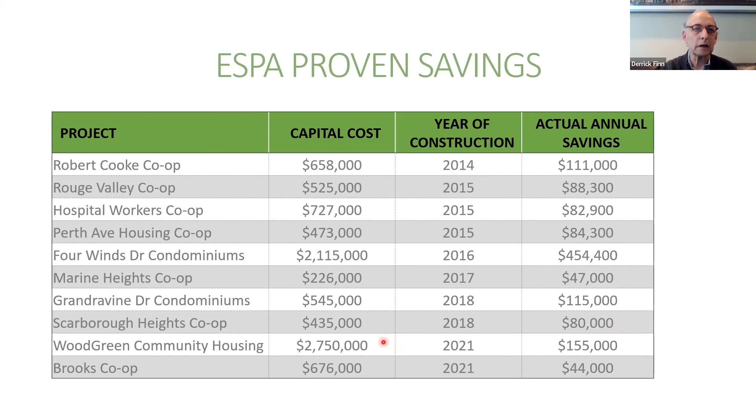So the idea of an energy audit is to understand what energy is being used in the building, how you can use it more efficiently, what measures can we do, and most importantly, what building renewal measures can we affect. We're all looking for reducing energy, reducing greenhouse gases, and how do we go about this?

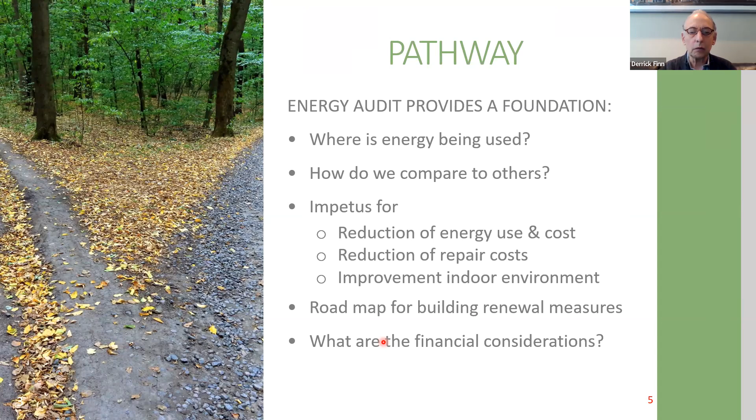So we see this really as a roadmap as to how we're going to proceed within our programs. There are 3 types of energy audits defined by ASHRAE, the American Society for Heating, Refrigerating, and Air Conditioning Engineers — a big organization in the States and throughout the world.

They've defined them. The first is a walkthrough audit, which simply is going through a building very quickly, collecting some basic data, looking at the utility bills, and saying, yes, looks like we can save money by replacing the boiler, or you have some lighting opportunities in the garage, etc. It's very ballpark — it's not measure by measure.

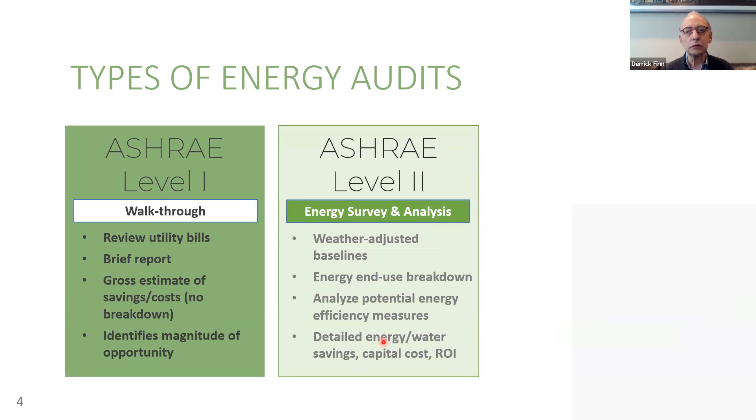The next is an ASHRAE level 2, which is a much more detailed survey. We take utility bills, go through an analysis using variables like weather — so it's weather adjusted, could be occupancy adjusted, production adjusted — and we break down the energy use within the building by each of the elements, and do an analysis, a detailed savings calculation. I'll show you some examples a little bit later, showing the savings, the costs, and the return on investment.

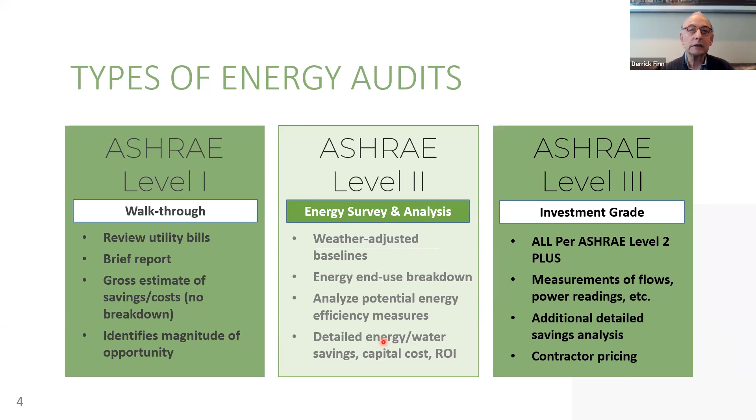When we step into the energy savings performance agreement, or the guaranteed savings, we need an investment grade energy audit. So it's everything that happens in level 2, plus we also go and do some additional measures — we measure how much air is coming out of a rooftop unit, the makeup air unit, the power being drawn by pumps, motors, etc., the critical equipment. Then we go back to the calculations and do much more detailed modeling. We go to contractors, get contractor pricing so that we can guarantee not only the savings, but the pricing as well.

So the process involves, number one, if we can get incentives — and we can right now through Enbridge, for social housing $8,000, up to $8,000, for other buildings up to $4,000 through Enbridge. Collect all the data, we get utility bills, building condition audits, and then we input all of this to develop the baselines, and we benchmark the buildings against each other.

Through our site visit, we break down, as I've mentioned earlier, the lighting, the heating. Now these are individual — this is not a cookie cutter. Every building we would produce one of these end use breakdowns, because we want to say, okay, where is the lighting and where is the heating? So for example, heating is 47%, so we know we have that much to play with in energy efficiency. We can't save 100%, because we only have 47% of the energy being used.

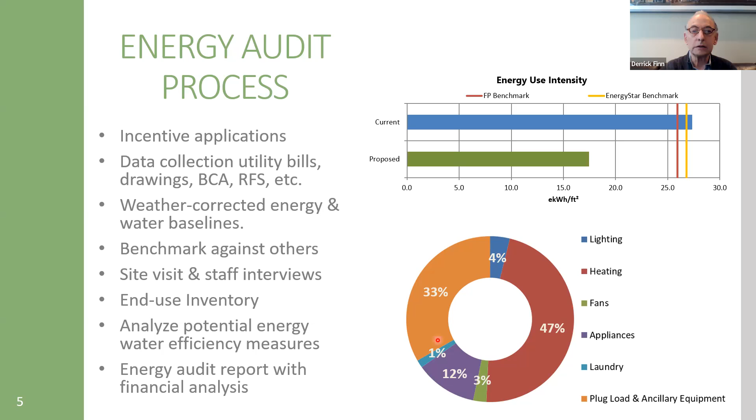So we list the potential measures, and we do a report with the financial analysis giving us paybacks or return on investment. The critical thing here is the weather-corrected baselines or any other variable, because this is what we use going forward. This is what we would measure against.

The baseline is this black line, which is generated by the computer, and it's really just a simple regression formula based on occupancy, weather, or production. These bars are the actual data, and you can see in this case it's a pretty good fit from the baseline. This is what we would be measuring going forward. We would input the weather data and we'd be able to see the savings. I'll show you an example.

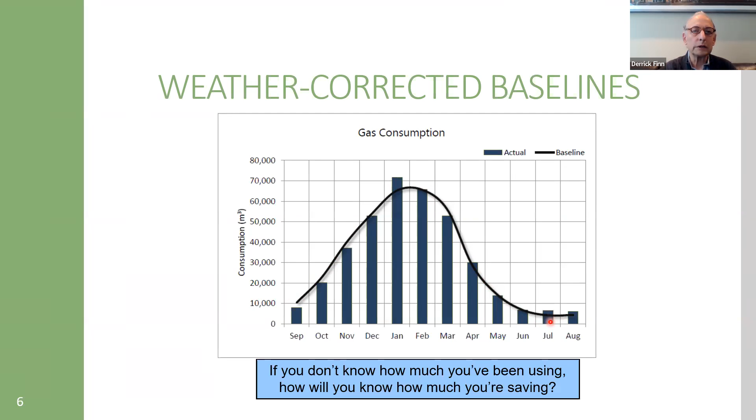We really need to know where we are before we can measure how we're going forward and what we're saving. A lot of early programs went in for lighting, compact fluorescents back in the 90s. We just threw them in and nobody ever measured, so we never really got some good data.

Then we go to the tools that we use. I mentioned that we use regression tools to develop the baseline. RETScreen has a good service and good software. We use Metrix as well. We've developed our own data collection software on iPads, so we go through the building and pick up make, model, serial number of every piece of major equipment, plus lighting, toilets, whatever else we want to model through eQuest, and RETScreen again for clean energy management.

One of the keys to being able to guarantee energy savings and react in real time is to be able to put in real-time energy management for gas, water, and electricity. We can tell minute by minute how much energy or water is being used in a particular building, which is key when we find out that we're not hitting the target or if we're not close enough.

Then we have infrared scans. We have fancy ones done using drones. This is actually an example here. The drone will get right up, so you'll see the building at the building level. I'll show you in the next slide—you can see this is the building where the heating, the window wall, is obviously where the heating can escape. But on the slab here it's nicely insulated and it's black, and the same on this column section.

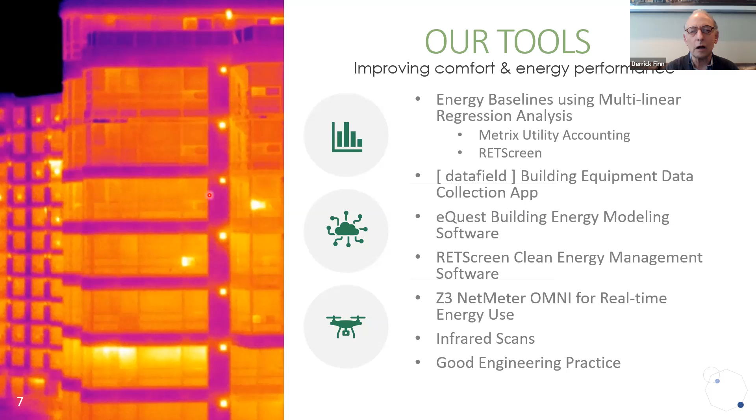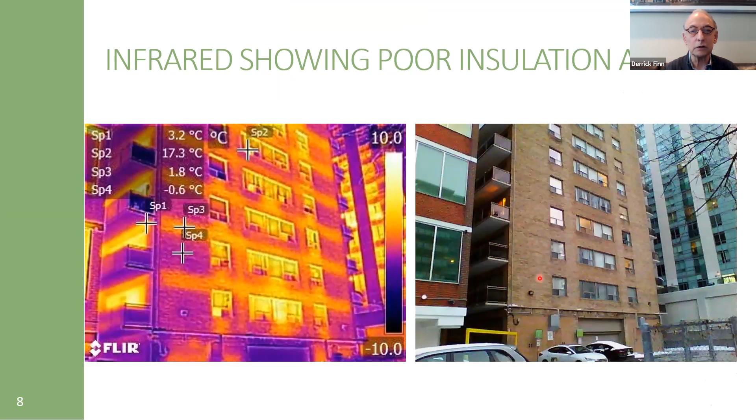Staying with the building envelope, we want to make sure that there's air sealing, that we compartmentalize. We don't want to use the stairwells or the fire hose cabinets as a chimney going up—air chimney effect in buildings. As you come in the front door, the air gets sucked in, and the elevator shaft or the fire hose cabinet shaft will act as a chimney, and the air goes up to the top of the building. So you seal the top of the building.

We want to look at some of the long-term measures: window replacement, EIFS, which is the exterior insulation, and then roofing. If you're going to be doing roofing, make sure it's R20. This is your opportunity—roofing is not done often, so you want to make sure.

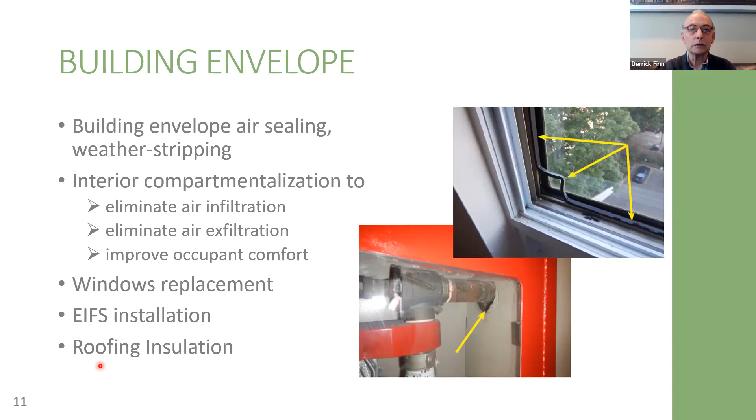So for energy efficiency measures, as Ian had mentioned earlier, heat pumps is one way to go. The advantage of heat pumps is that we can now not only provide heating to buildings, but also provide cooling. With climate change, we need to be able to provide some air conditioning, especially in certain circumstances like long-term care facilities, etc. Heat pumps is an excellent way to get rid of the carbon.

This here on the top left is an atmospheric boiler. If you put your hand on here, you would just get your hand burnt because that's how much heat is simply going up the flue at all times. What we want to install are these energy efficient condensing forced draft boilers. The first time I went into a boiler room where we'd installed one of these, I put my hand on it.

Oh sorry, it still had the plastic wrap on it, like the stuff you get on your iPad when you buy a new one. I turned around to the contractor and said, I thought you said these are in operation. He says, they are. I said, well why didn't the plastic melt? He said, touch it. And it was just as cool. The heat just does not come out of there. That heat loss is just diminished.

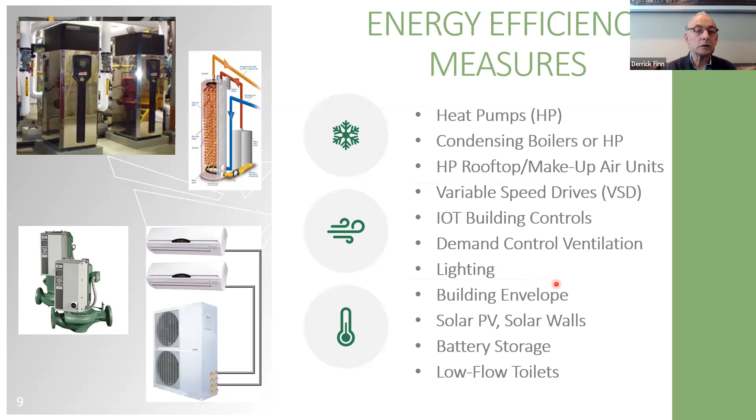Lighting, of course, everybody is doing LEDs. And you think, well, I've done my LEDs now, move on. Well, now we've got new LEDs which are smart LEDs, allowing for occupancy sensing and dimming. You can install the LED at 80%, not even at full brightness, just to get started with. So they're quite practical. Solar walls, energy efficient toilets, and of course battery storage, which is great.

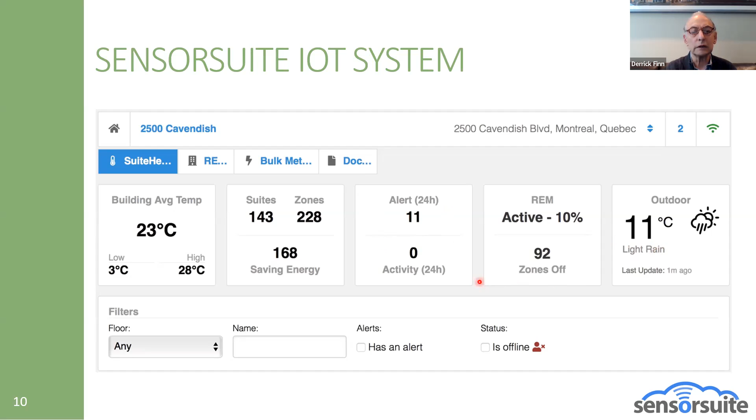So this is a system that we installed at Wood Green, where we can pick up on a dashboard all of the critical building equipment. We can find out what temperature is in the building, see if there are any alerts or problems. Even the outdoor temperature is shown. And it takes us right down into the suite. You can see within each of the suites what the temperature is, heating or cooling, and this can be limited, and problems can be addressed.

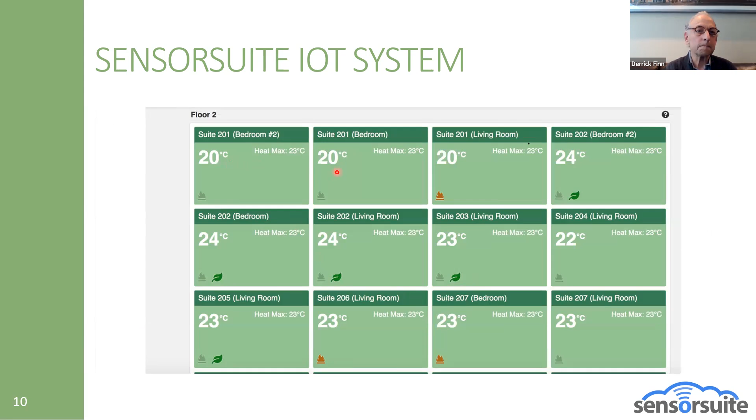So this is an output from a typical energy efficiency report, and you can see these are conventional measures - looking at high efficiency domestic hot water boilers, variable speed drives, lighting, booster pumps, building automation system, toilets, etc. You can see some of these measures have fairly long paybacks. The lighting, because this is in-suite rather than common areas. And we put in a high efficiency chiller, 33 years.

But overall, and this I must stress, if you look at this holistically, we come down with a 5.3 year payback very easily, financed under an energy efficiency program where the building owner would actually have to pay nothing up front, and this could all be paid out of savings. The key is that we haven't taken off portions of this and done the boilers here and a bit of the makeup air there - it's a comprehensive retrofit, with decent greenhouse gas savings, almost achieving what we need for some of the funding programs.

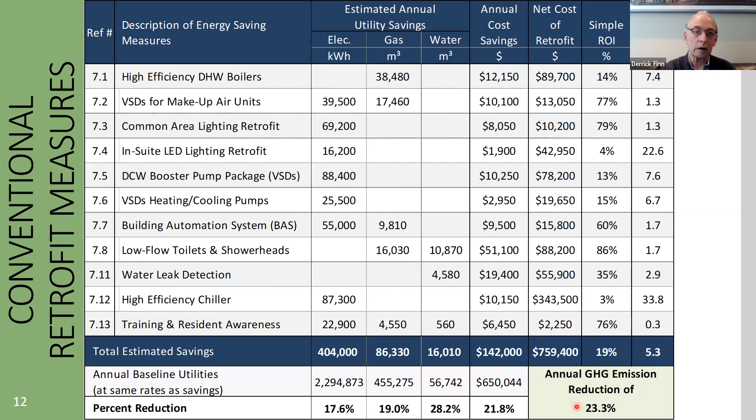Then we go into the conventional and deep measures. As Ian McVeigh said, these are the areas that we have to start concentrating on to meet Canada's net zero goals, and that applies to cities and Ontario. Then we have to look at these things. It's not just individual, here and there - it's every building. You have to remember it's not other people's buildings, it's your building, and everybody is responsible.

So in this audit, we have a greenhouse gas reduction of 64%, which is really great. We have a terrible payback of 27 years, but we have now put heat pumps into every single one of the units, $1.5 million being spent there, which is the bulk of the funding. We've got some other long paybacks, putting in solar photovoltaics, and solar duct to preheat the makeup air. So we have some long energy efficiency measures in here, but we have great long-term energy savings and reduction.

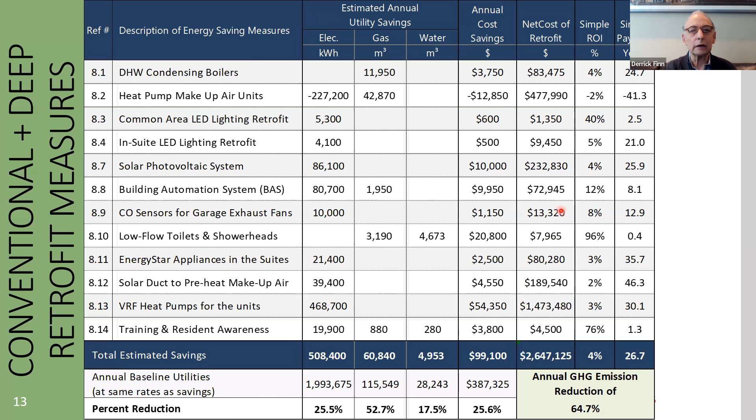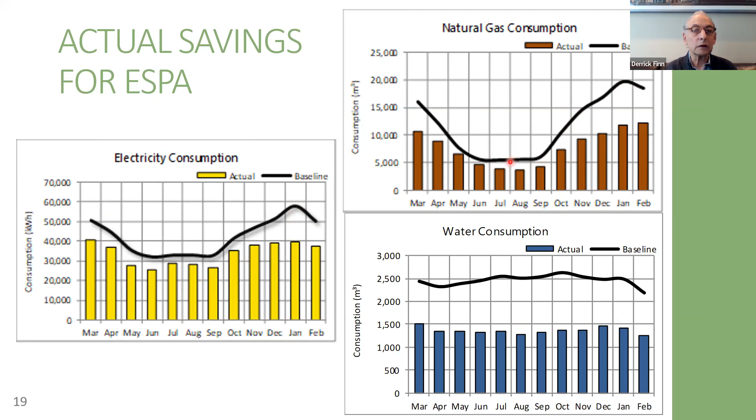So back to our energy baselines. I showed you the energy baseline in one of the earlier slides, and here you can see actual savings under energy. You can see the energy baseline staying below that - all the areas between the black line and this yellow, for example, that is all your savings. Water consumption, you can see in this building, is absolutely amazing - 30 or 40% energy and water savings, and then natural gas. Again, you can see wintertime is when we're getting our savings; in the summertime, the natural gas is only being used minimally.

So the real-time metering that we put on was a real eye-opener when we first started with this.

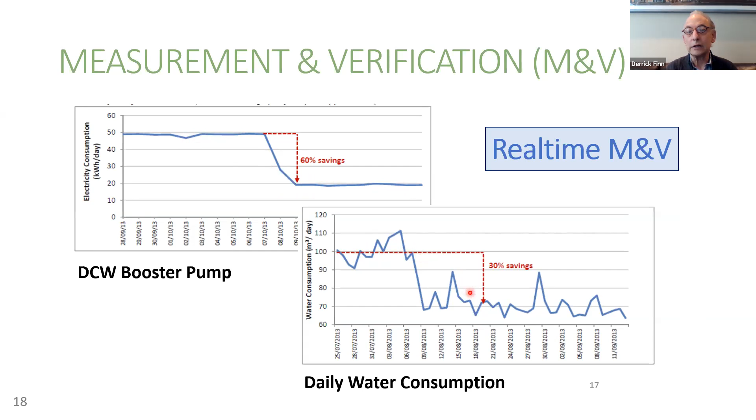And the same with the toilets. This is what the consumption was on average pre-installation. So pre-installation period, and it dropped, and we had 30% and just leveled off.

So just back to the first slide that we talked about, just to wrap things around, where's energy being used? Well, we develop our energy baselines, develop how much we're using, and our end use inventory. We compare buildings by using the benchmark. We go through and we come up with energy efficiency recommendations. We address repair costs using new equipment and indoor air quality with better ventilation and heating and cooling.

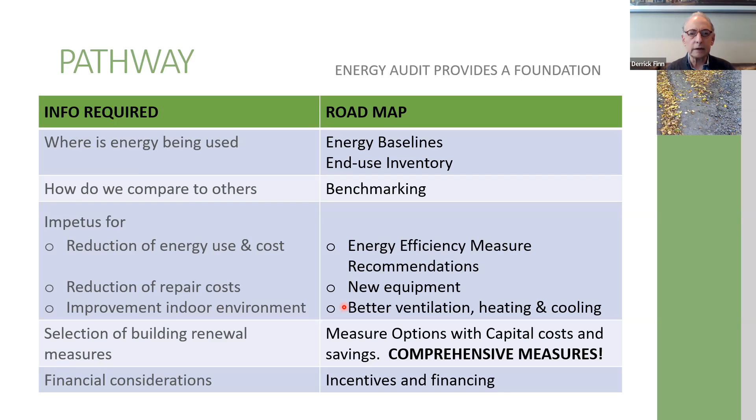And Matt had a really good slide on the impact on residents. And then the financial considerations, of course, applying for incentives and for financing.

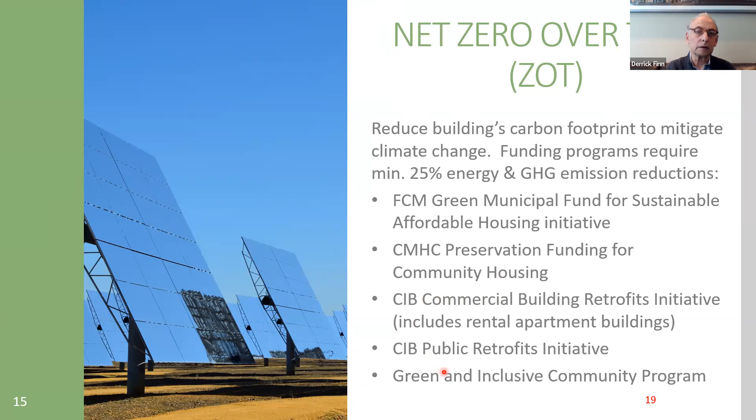There are a number of programs that are available. I'm not going to go into detail, Matt will be covering these tomorrow. But FCM has the Sustainable Affordable Housing Initiative, CMHC has the Preservation Fund, and for commercial and public buildings there's the CIB funding, and then the Green and Inclusive Building Community Fund, amongst others. There's also incentives from Save on Energy through IESO and from Enbridge.

So how do we do this? The key is, what are we going to be doing? We need our roadmap. We need to know what are we going to be doing, how these things are going to work, what is the interaction. Ian Sinclair mentioned about the interaction. If you do your building envelope, then your heating load is reduced.

In one of the earlier slides, if you do solar preheat of the makeup air, then you can use a smaller heating section in makeup air. So we have to be able to address these intricacies, and to be able to also blend the payback so that we get something reasonable that we can work with. 50 and 70-year paybacks or 3-year paybacks, bring it down to something reasonable to allow us to do the things. So funding and incentives.

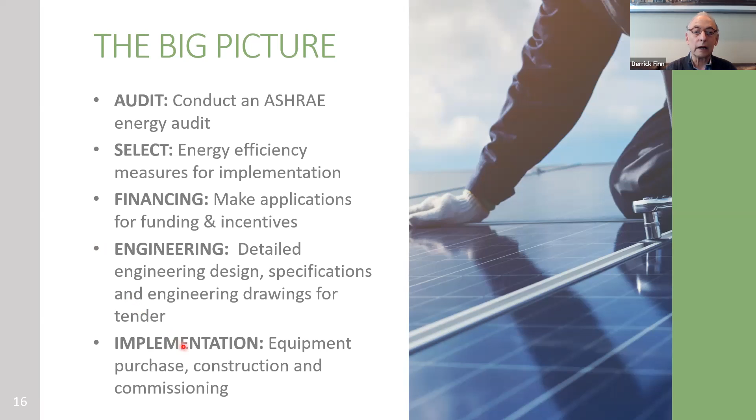We then go into engineering, specifications and detailed drawings, make sure that everything works for the building, tendering, and then the implementation. And Marcia is going to be speaking about the implementation phase in the next session.

So again, to make sure that we achieve these savings, the key elements are: number one is measurement and verification. So we're measuring on an ongoing basis, reporting quarterly, reporting annually, and we know what's going on. We have maintenance, we have an established maintenance program. The reports are done, the chemical testing is done for the water.

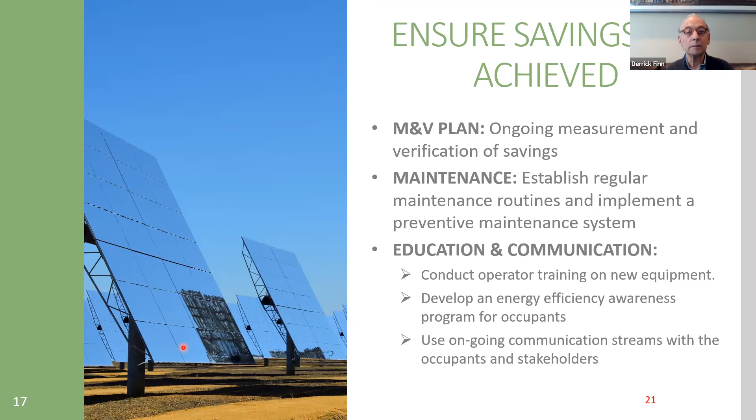And then the tenant or resident education and communication, putting a system in place, and making sure that the operators are properly trained, they understand how to use the new equipment, the occupants know what they can do to reduce the energy impact on the building, and then provide the ongoing communications.